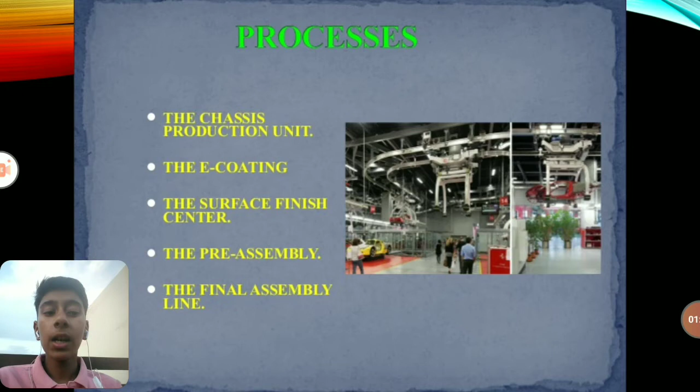Now we shall go through the processes: the chassis production unit, the e-coating, the surface finishing center, the pre-assembly line, and the final assembly line. The first process is chassis production.

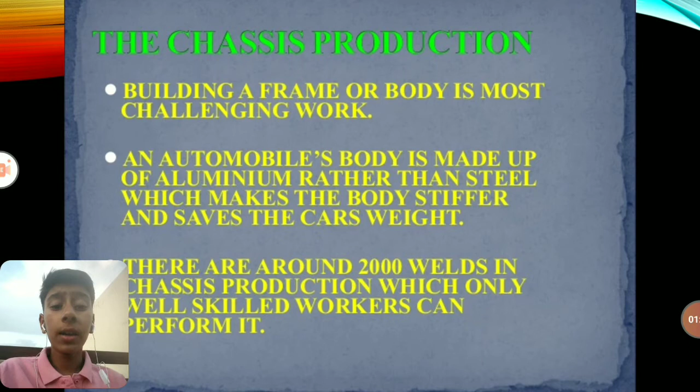The electrocoating or e-coating process means making the car corrosion-free. When I was a kid, I was stuck on the question of what corrosion is. When I came to class 10th, I learned that corrosion happens when acid or moisture comes in contact with metal, causing it to corrode and become very weak.

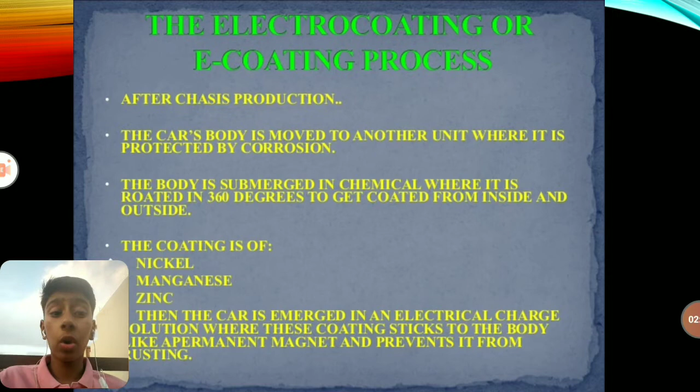After chassis production, the car's body is moved to another unit where it is protected from corrosion. The body is submerged in a chemical and rotated 360 degrees to get coated from outside to inside. The coating is basically of nickel, manganese or zinc. The car is immersed in an electrical charge solution where this coating sticks to the body like a permanent magnet, preventing it from rusting and corrosion.

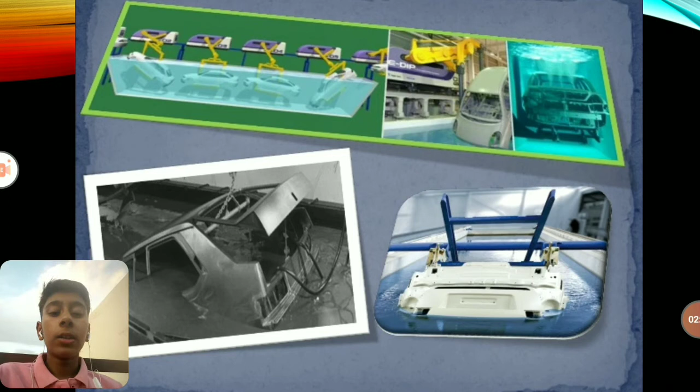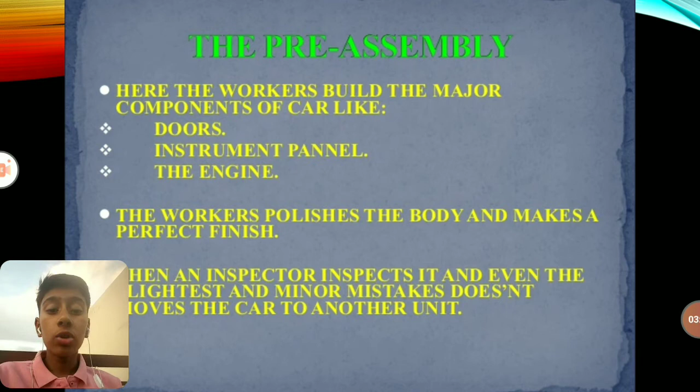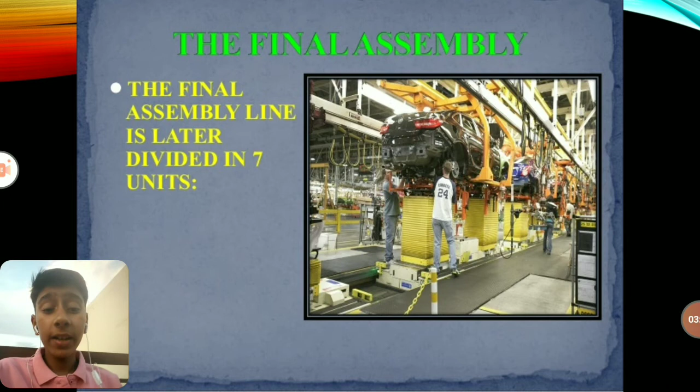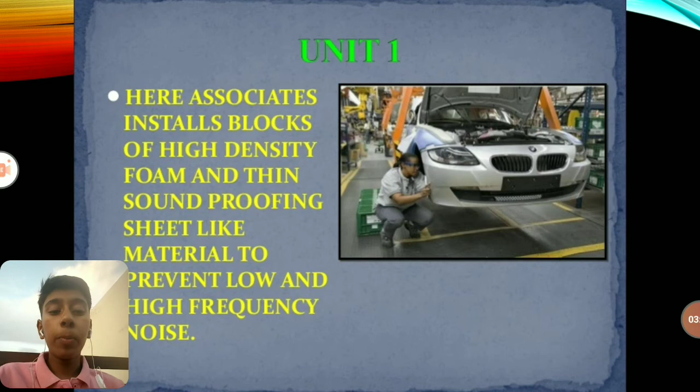The final assembly is divided into 7 units. Unit 1: here associates install blocks of high-density foam to form thin soundproofing sheets, like dampening material, to prevent low and high frequency noise.

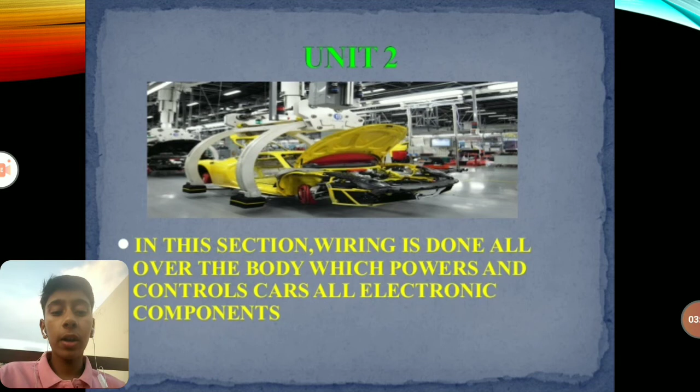Unit 2: in this section all the wiring is done, the battery is applied to the car, and all the electric components are installed.

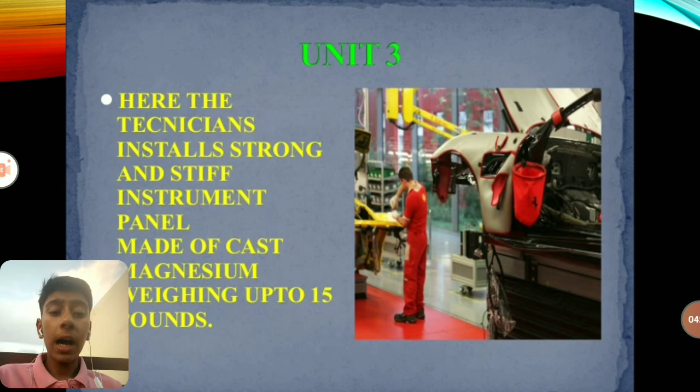Unit 3: here technicians install a strong and stiff instrument panel made of cast magnesium weighing up to 15 pounds. Unit 4: in this unit, two skilled technicians attach the engine to the chassis, which is the heart of the car.

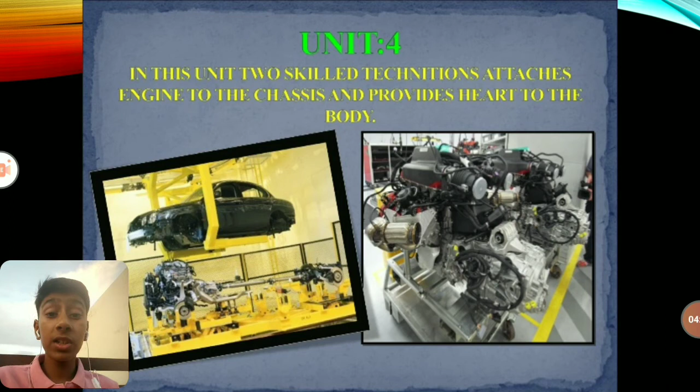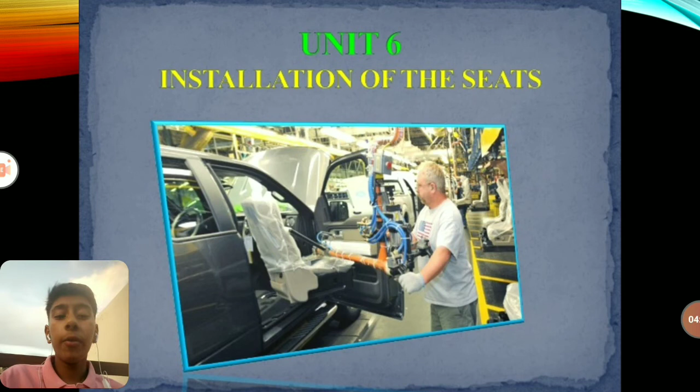Unit 5: here the technician gives the car its windshield and windows as well. Unit 6: in this unit the technician installs the seats where you sit and drive properly. Unit 7: the car's wheels are mounted so that we can drive.

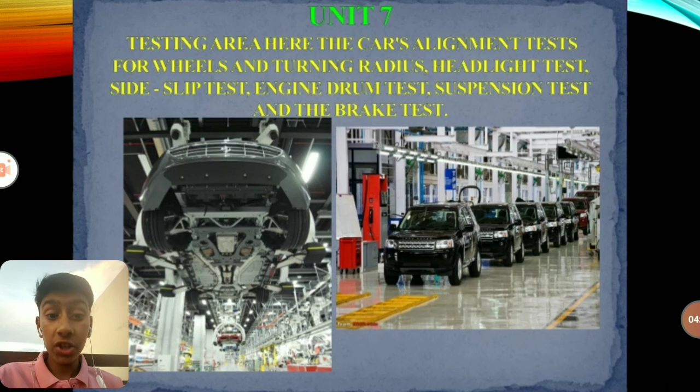Unit 7, testing: here are the car's alignment tests for wheels and turning radius, headlight test, side slip test, engine drum test, suspension test and brake test, to give a perfect combination.

Advantages: human or manual effort is reduced to a greater extent. Accidents occurring due to operations like cutting, drilling, grinding, etc. are very rare. Production becomes very fast, and the product obtained is relatively perfect.